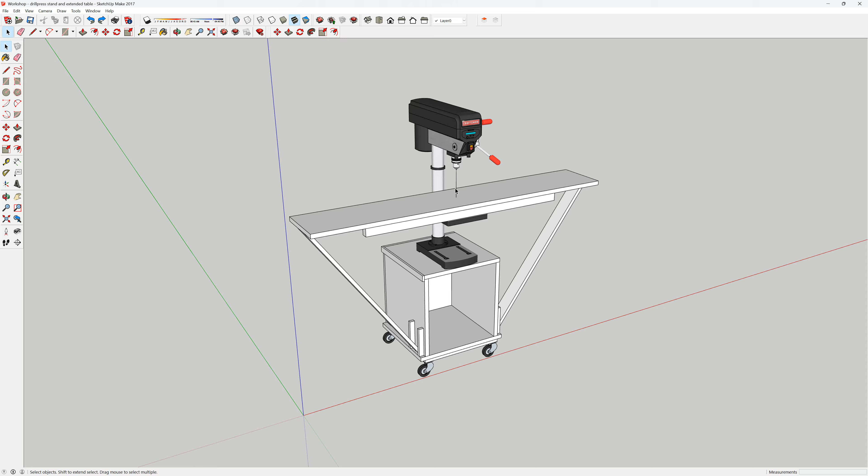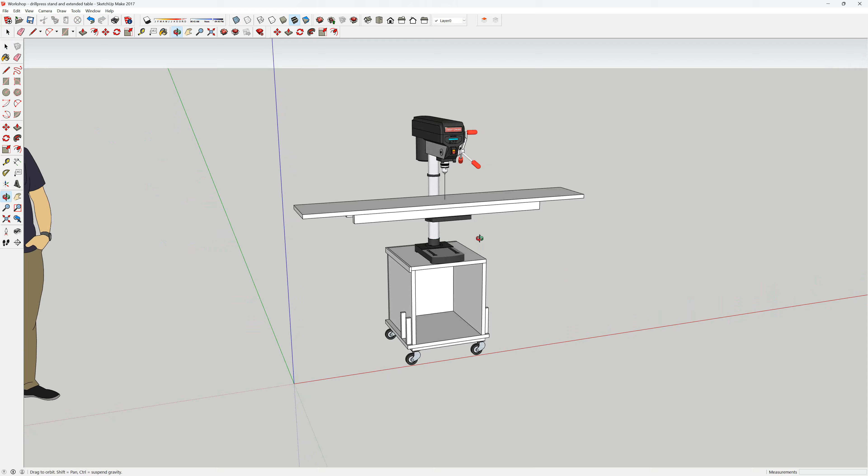Leaving that aside, I had a requirement to have an extended table put on the drill press. As such, I realised a little bit late in the game that it needed braces. I was quite surprised that braces were needed, but when you think about how levers work - once I imagine I didn't have braces there, once I'd made up this auxiliary top and bolted or screwed it well to the base, I was quite surprised, shouldn't have been, but I was surprised at how little pressure would be needed to exert a twisting action to the table.

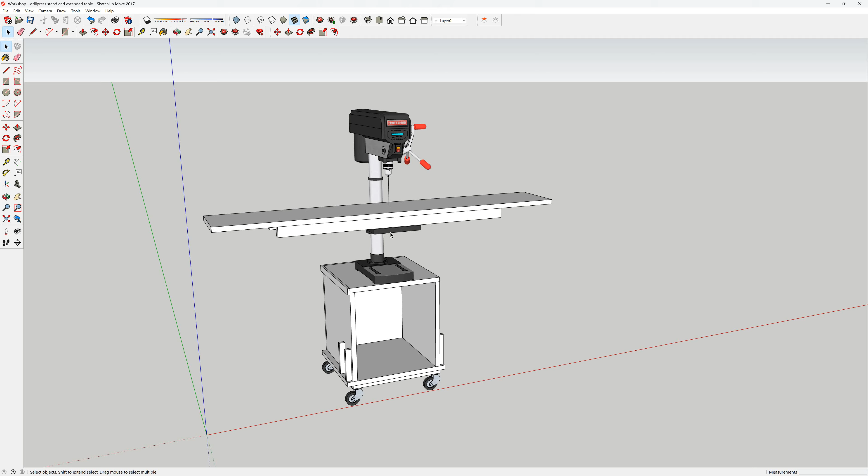I was thinking because it was so strong-looking, the metal base or table was going to be very strong - I'll bolt an auxiliary table on and I can get to drilling holes. Yeah, well, as it turned out...

A little bit of pressure here - that's 900 millimetres from the centre line out to this point - a little bit of pressure here actually tweaked the table. Darn it. I was quite surprised, but one of the things I cannot have is that occurring, because any twisting of this base will misalign the hole that would be drilled in the item I want drilled accurately. So long story short, let's just add braces to it.

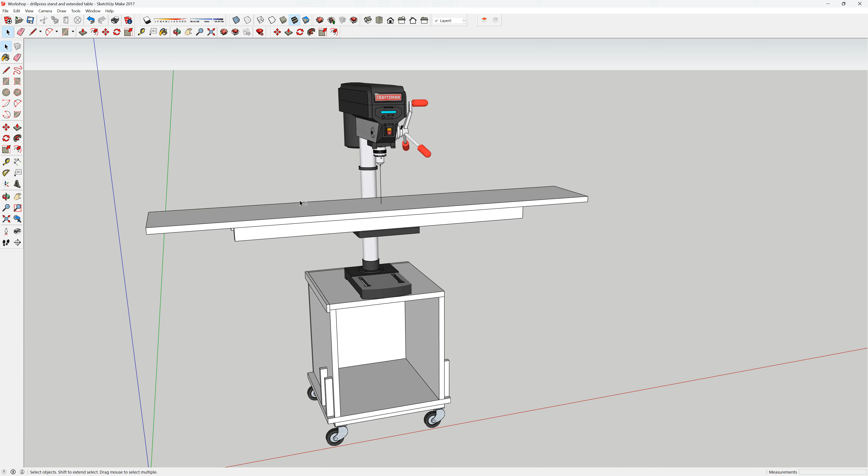Oh yay, says I, isn't that a good idea? Yeah, well, it was, up until the point I realised I needed something more to the cabinet I'm building, this one here, than the existing cabinet actually has. And to be fair, it's not much, but not much is also a little bit of a nuisance.

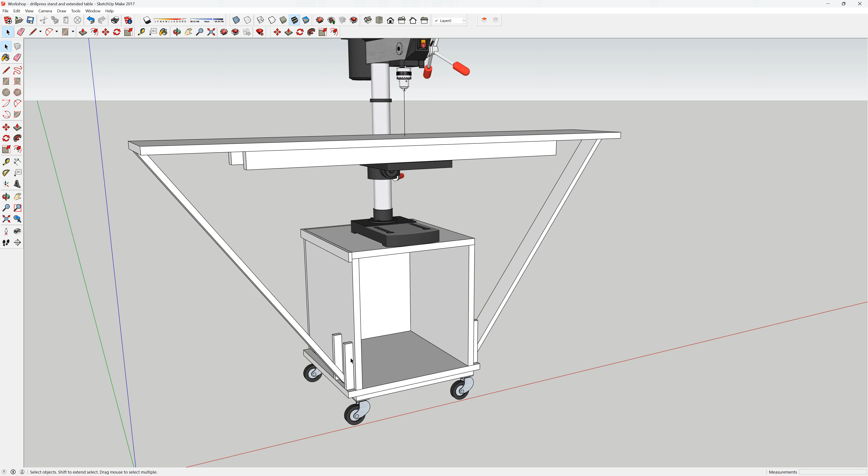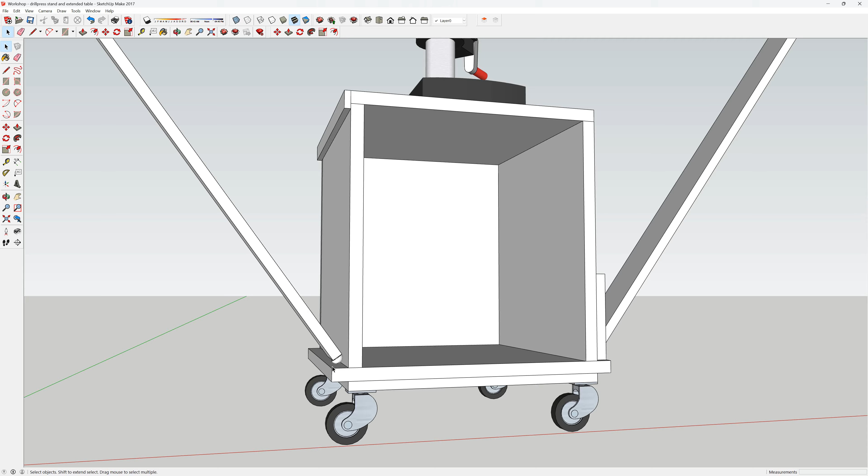What it was, is I had nowhere for the brace to attach or thrust onto, and in my infinite wisdom I thought I would just have it like this - it would nest into something that doesn't actually exist on the current cabinet, where the brace could come down, nest into the wall and the little extension here, and I could put a bolt as represented by this here. Whoops - I can have the bolt that I could turn so it can give a little bit of fine tuning to the brace. Simple.

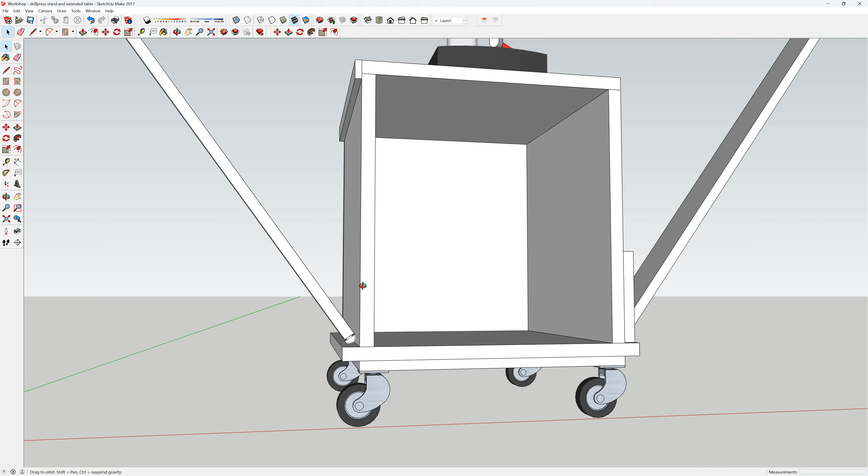So that little extension of the base of the cabinet was what triggered my idea of, let's do the darn cabinet now. Rather than trying to cobble together the bits and pieces required for this brace, I thought, look, I'm going to do this at some stage in the near future anyway. Let's do it now.

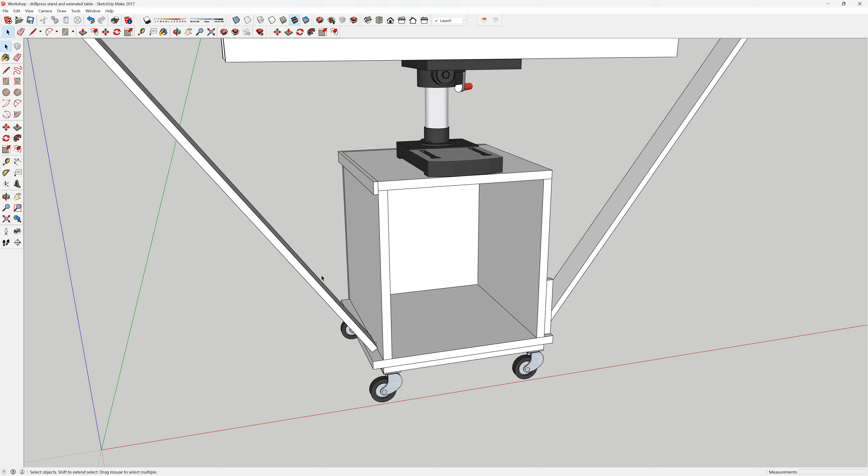And then I can get onto it. So I've got a little bit of time on my hands, so that's what I'm doing.

I'm currently at the stage where I've made this. It's bolted to the table, and I've put this brace on, with a couple of little door hinges to let it swing at each end. Then I realized I didn't have a little ledge to locate it on, so that's where I'm at.

This is actually what generated this video. I was worried about the leverage factor up and down here tweaking the table. I've actually created a lever here that, if I'm not very careful, would twist the top in this direction.

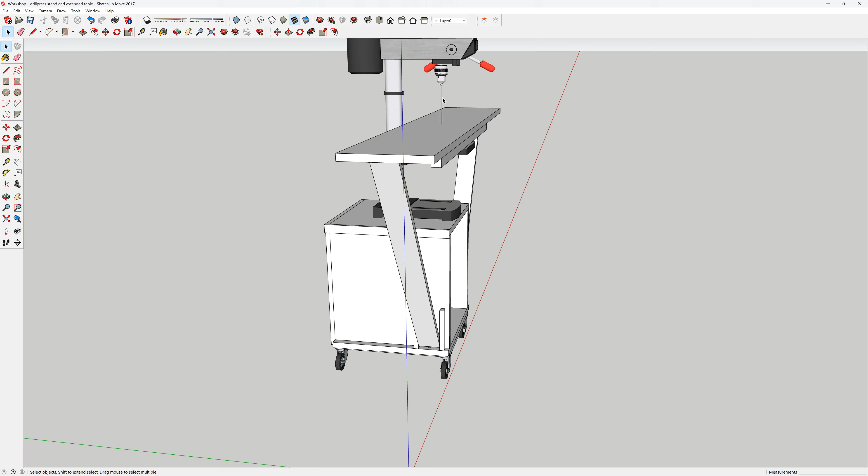Rotate it, because if that moves sideways, it's going to affect the alignment of this top, which isn't good for my requirement to have the holes drilled as accurately as possible and consistently in the item I want.

The pieces of melamine I'm drilling are 300 to 400 wide, that's okay, but some pieces are 2.4 meters long. So by the time I come out, say from this point, 2.3 meters out, there's a lot of overhang, causing a lot of pressure here.

When I move the panel in and out this way, I could induce twist if I'm not careful, and if the brace itself isn't in the correct alignment, it could cause problems too.

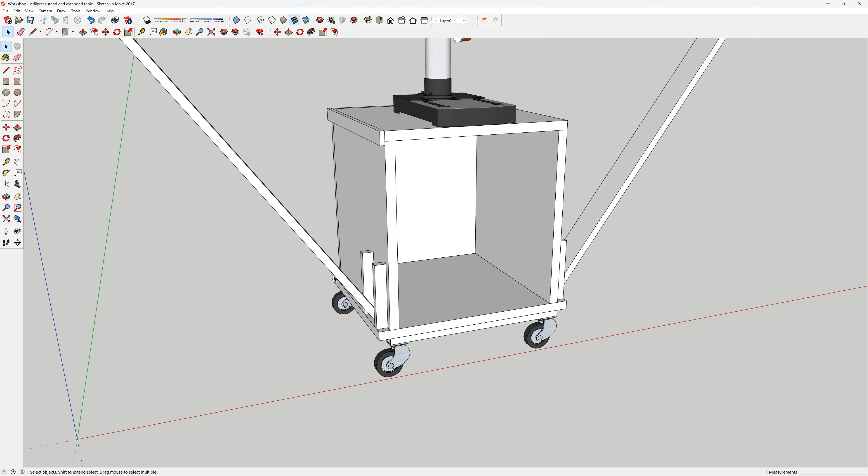Anyway, easily remedied, said I. Let's just run some pieces that locate and restrict the movement of the brace. Very simple.

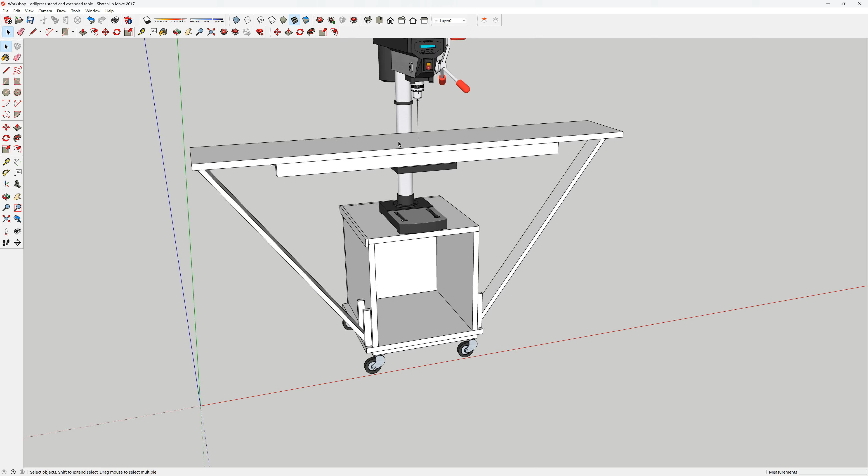When I was looking at this little mock-up of what I want to build - and the reason I build them - I considered: hang on, if I want to lift the table up and make use of this extension or auxiliary table, this static length brace won't have anything to thrust against.

So if I were to lift the table and the braces, because they're attached, if I wanted to move it up say 100 millimeters, I've got nothing for the brace to attach to because it will just swing down. I thought, that's easily fixed.

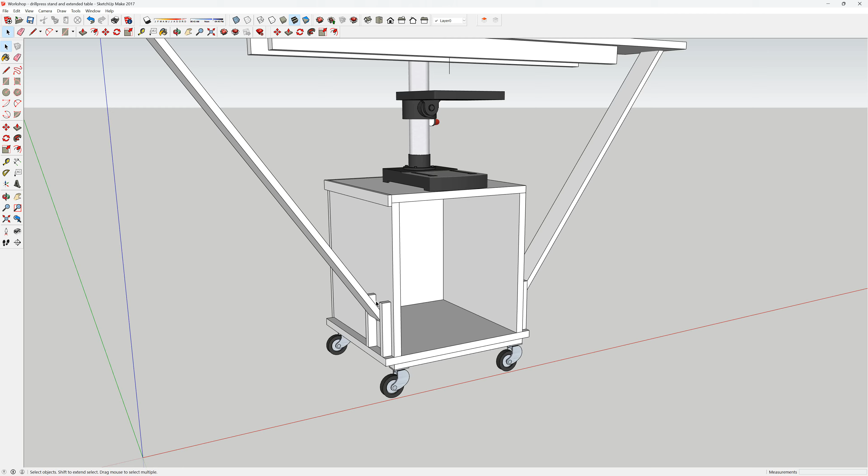If I know what that lift dimension is, and I just mentioned it was 100 millimeters, I can pop a little panel that's 100 millimeters in there, and then my little adjustment bolt's head has got something to thrust against. That's a simple fix.

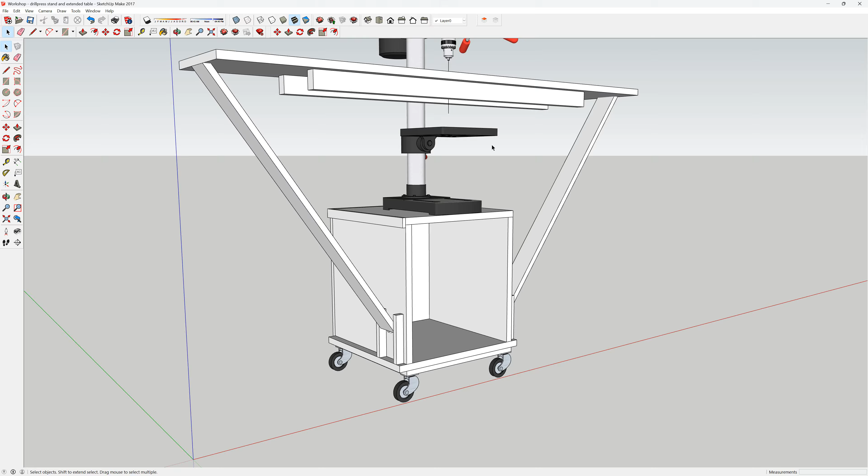I just have to know that the height I lifted it up to meets the requirement, but once it's in position, this will still be held level enough for me to find whatever length of packer I need at the bottom.

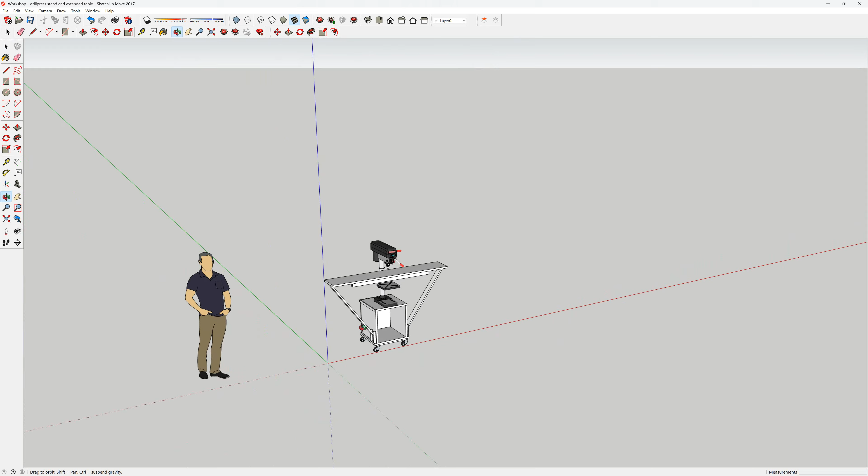It's not a finely engineered piece of engineering in this case - it's something that works in the woodworker's workshop for the very rare occasion that this top will ever be used in the future for something different than what it was intended for at the outset.

So, strips of melamine to be drilled with a 20mm hole - this is the setup that would achieve it. If it's used for anything else, I don't know what that something else would be, but it would still be able to be used in that manner. I'm trying to explain badly how it could be used in the future.

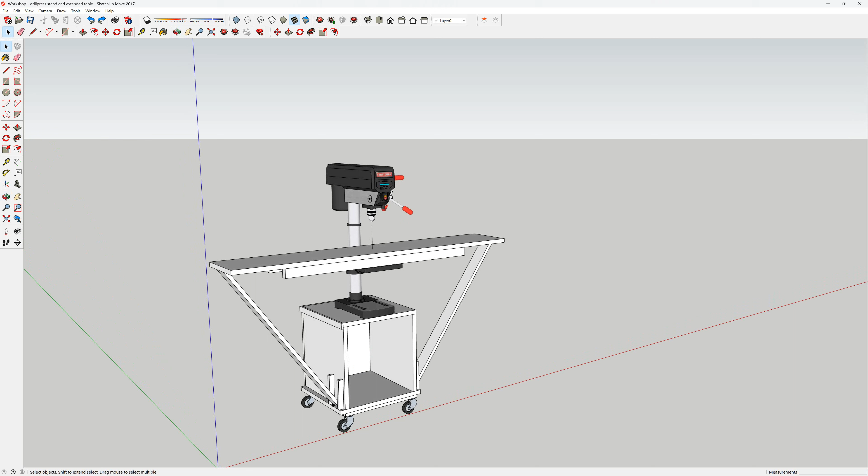Long story short, I'm going to add a couple of fillets to the side where the braces naturally want to sit. They may be a bit longer, lifting them up a bit more, but really I'm limited by the amount of lift I'm able to achieve here.

Plus, for minor changes in height, let's just back up a bit. I'm going to quickly do something I hadn't thought about, but I'll do it right now.

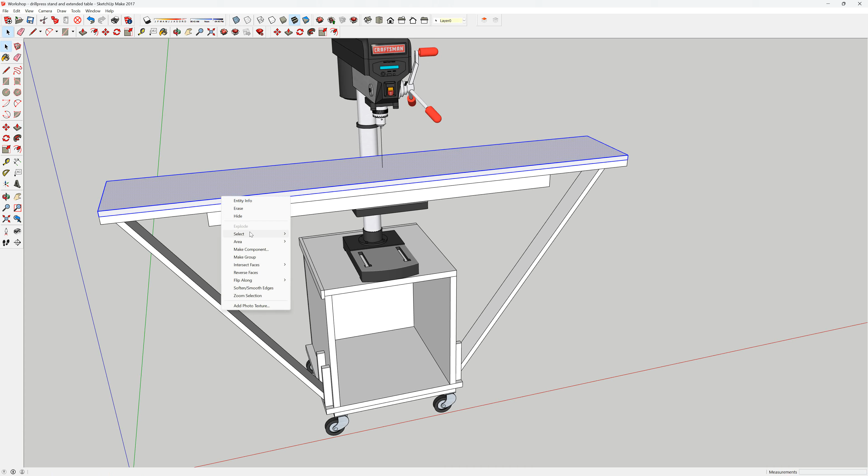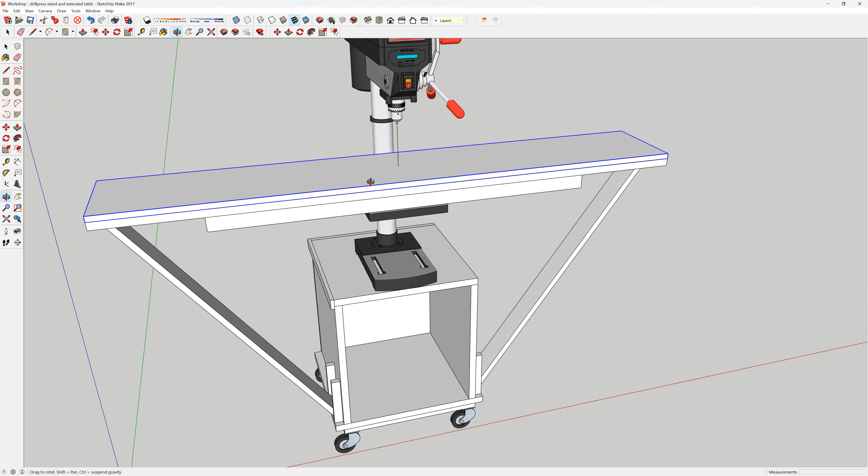I am going to make an auxiliary piece of melamine act as a sacrificial surface, not the table itself - it can be, but I don't want it to be. Having a second piece of melamine act as my sacrificial surface, I can also pack that up.

Whoops, let's just move that. I can pack that up and put packing pieces underneath it to give me my adjustment, and that's why I was okay with building this with a static length brace.

Otherwise I would have perhaps considered having a two-piece brace that could extend and contract a little bit. But wanting to keep it simple for the end use I've got at the moment, a static length brace was fine.

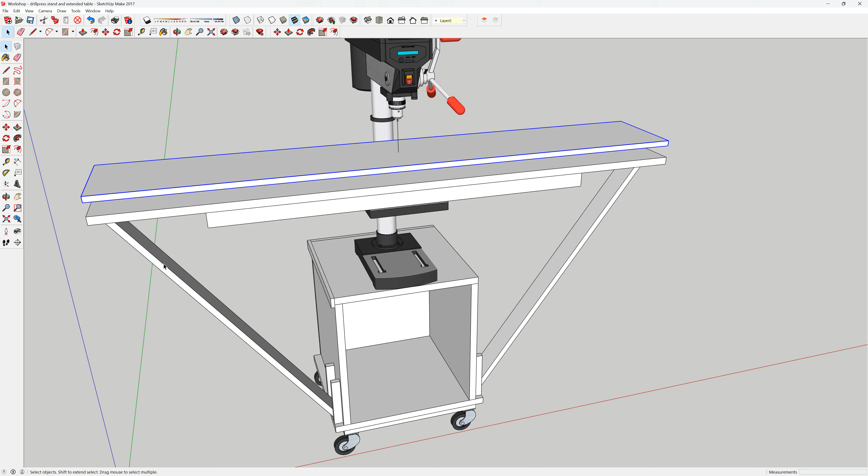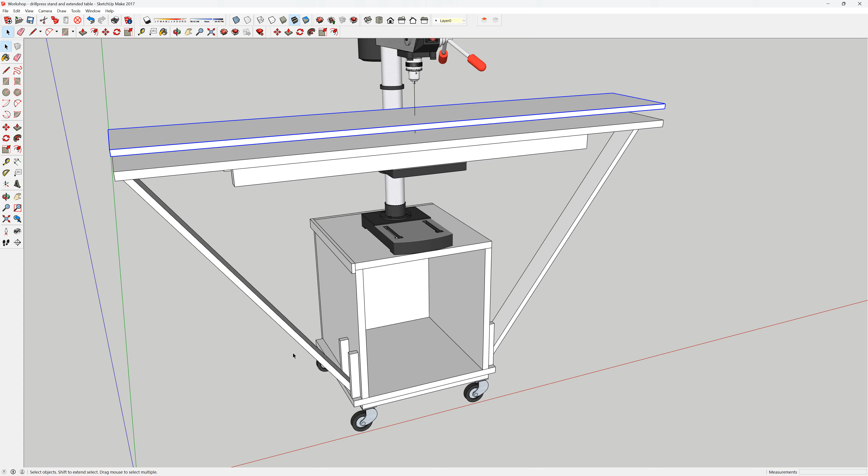But this means that the sacrificial surface can be lifted up and down with packers to mostly make this redundant. I think it prudent to at least build in the facility for what I've just explained, that these two fillets restrict the movement this way of the brace and locate it, should I lift the table up and require this to be still, it would maintain its position and alignment.

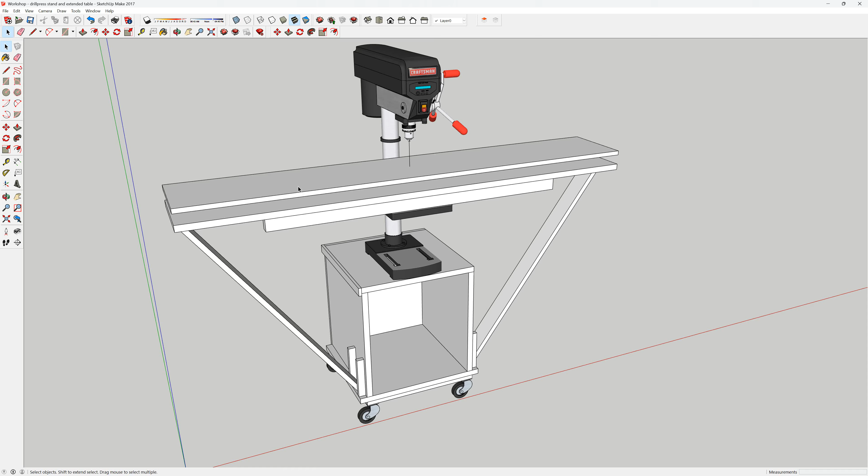So I'm building into the new cabinet, this one, the facility that may or may not be wanted but is there when it is. So that's it. And it came about because the cabinet that I've already got there is orientated a little bit differently from this. It doesn't have the open side to the front of the drill press.

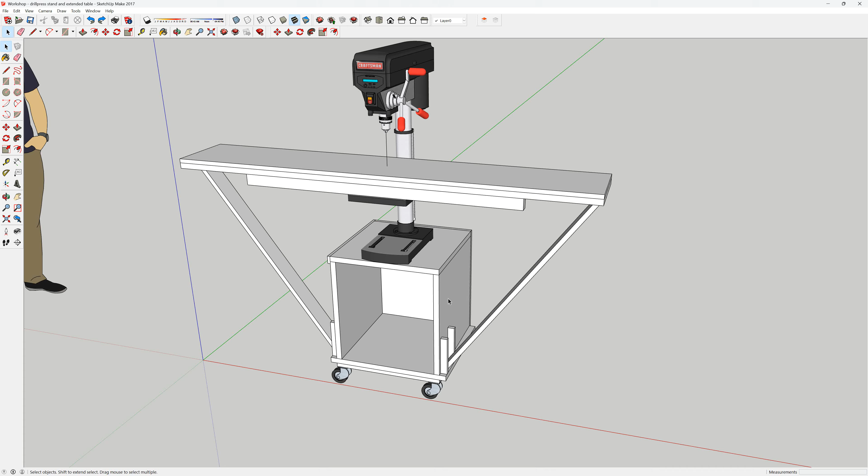No, I can't just turn the drill press round on the existing cabinet because it's not sized correctly. And I needed these little extensions to the bottom piece. That would mean a lot of mucking around being able to do that on the existing cabinet, and it not interfere with the open side, because this brace would be in the way of the open side of the existing cabinet.

Hence there was lots of little things that, hey, I just said let's do it now. Let's make the cabinet, use up some of the 25mm panel that I've got which is getting in the way, make all the adjustments and requirements for this particular purpose. It's not going to take long.

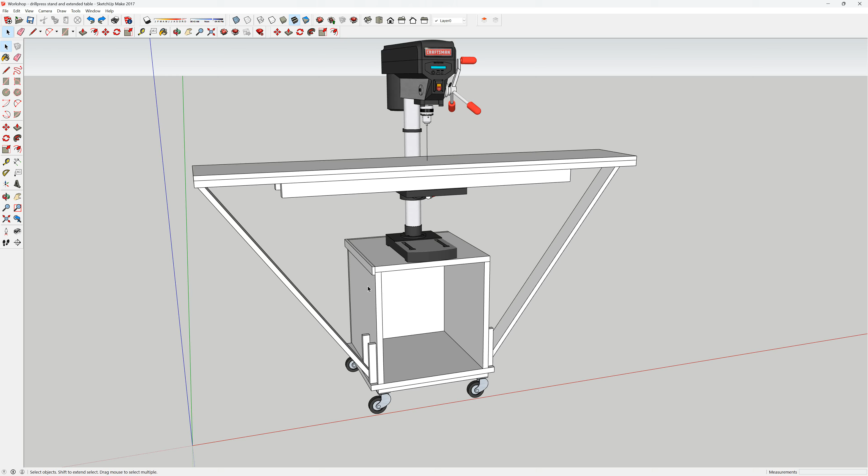Get it built. Don't worry about too many of the other details, they can be added on later, like clashing off the edges. Normally I would clash the 25mm edge with a 25mm piece of timber, then assemble it, and then everything's much tidier.

But the downside is if I were to clash all the edges of, say, the top, that clashing piece would be hanging over the melamine itself, meaning my fixings aren't as robust. So

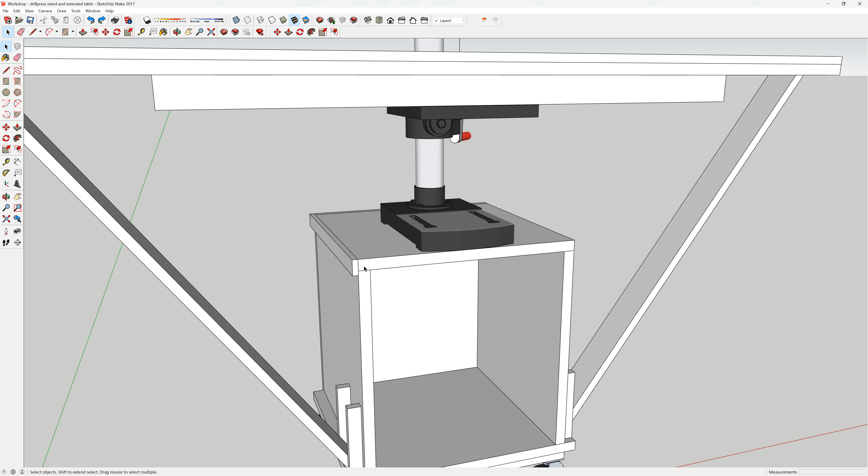I wanted to make the top of the box as strong as possible, and I wanted the top to bear fully on the 25mm piece of the two walls, possibly even the back, and they bear directly on the base. So

Pre-clashing it and then assembling it introduces some of those problems. Here I make up the box, get it working, and at some time in the not too distant future, of course, I could clash off the edges and make it look a little bit tidier.

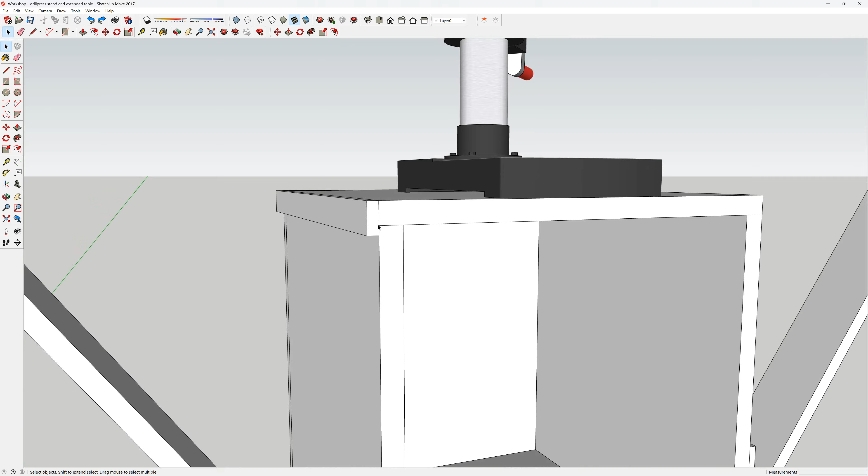But it's a compromise. Besides which, if I made the clashing strips a little bit wider, yeah, they'd disappear the joint there. So again, making it appear tidier.

So there we go. It may well be that I leave the bottom raw, or I may extend this out a little bit. Who knows? But that may get clashed off or may not in the future as well. Probably will get clashed, and then a shelf or some drawers put in at that later stage. All these things.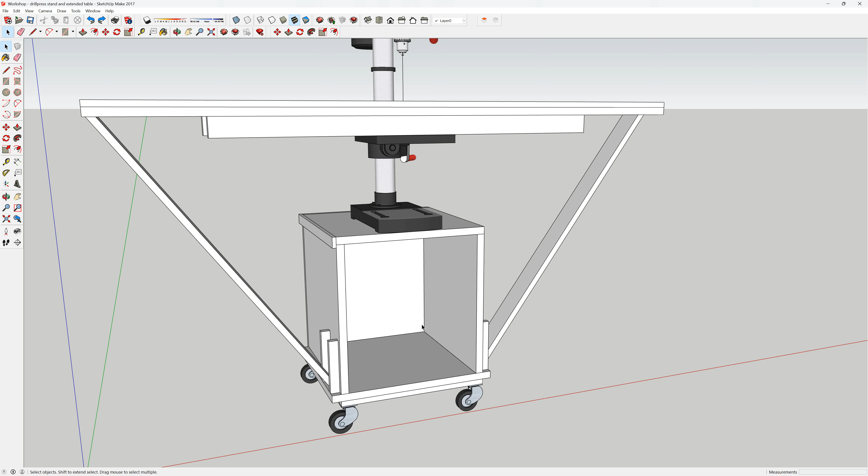SketchUp model drew some of them to my attention. I can now go out into the workshop. It's a rainy old day today. Really, basically we should be in the middle of summer. It ain't summer out there at the moment, I can tell you. I can go out to the workshop, cut down to size these panels, and start getting into it.

And as I said before, get it assembled, make it be that it will be a little bit utilitarian, so that I can start using it again as a drill press, because really, after all, that is what I want to be doing, not concentrating on making lovely looking cabinets. So that's where we're at, and back into the Dave's Diary set of videos for the melamine top, which I really want to have some progress to show, so we can move ahead with that.

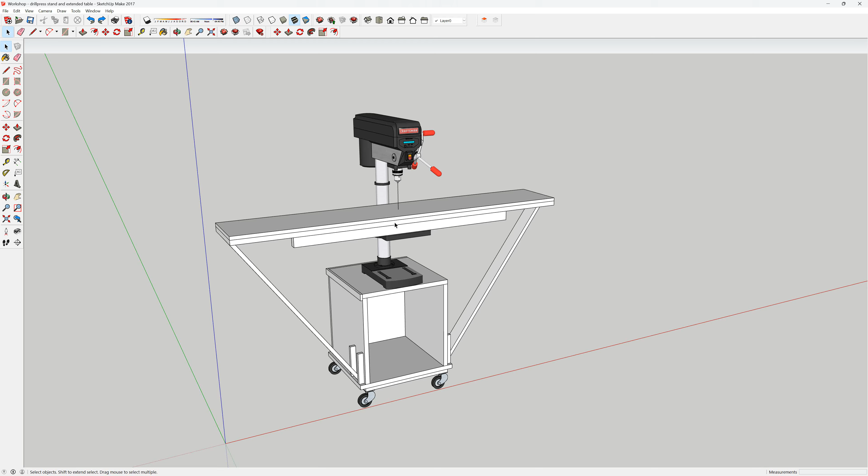Waiting for a couple of items to arrive. If I haven't mentioned that already, I'm waiting for a couple of tiny little items that will help me move forward in marking out and drilling the holes.